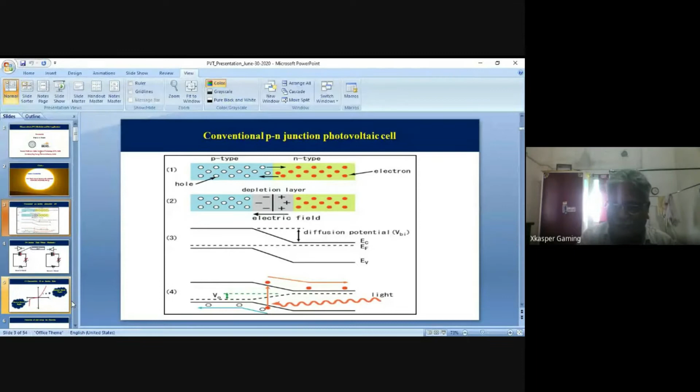Here again, I want to tell you one thing. Anyone who has seen the solar cell will notice the N is on the top, P is on the bottom, and the thickness of the N is in micrometers and the thickness of the P is in millimeters. The N is more conducting than P. All these points you should keep in mind so that I can explain to you in a better way how the solar cell is concerned.

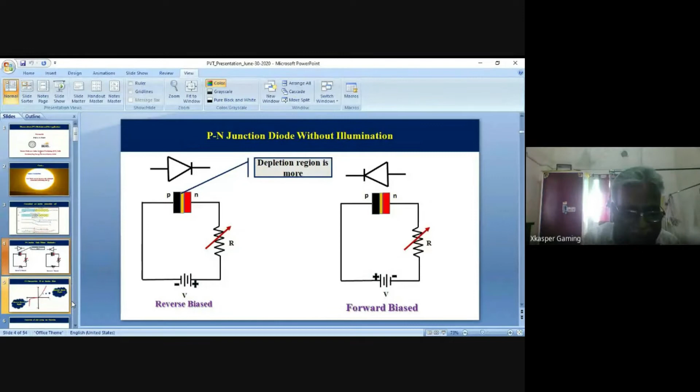So first, in these two diagrams, N and P type material has been shown on the left hand side. When the N, which is the negative terminal, is connected to the positive terminal, it is called the reverse bias. But when the N is connected to the negative, it is called the forward bias. That means the outer current by the battery is in the direction of the current created by the movement of the holes from P to N. So it is added, and because of that it is called the forward bias, and on the left hand side, since it is opposite, it is called the reverse bias.

Just see, now we have the battery in the external circuit, and we have the rheostat. By changing the rheostat, we can change the voltage, and once the voltage changes, the current changes. For different voltages, we will have different currents. If you plot this IV curve, in the forward region and the reverse bias, you can see it very well. This is a very well-known formula. Sometimes students refer to it as the VI curve, but it is not a VI curve, it is an IV curve, because the variable is on the x-axis and the dependent on the y-axis, just like y equals mx plus c. Now, next slide.

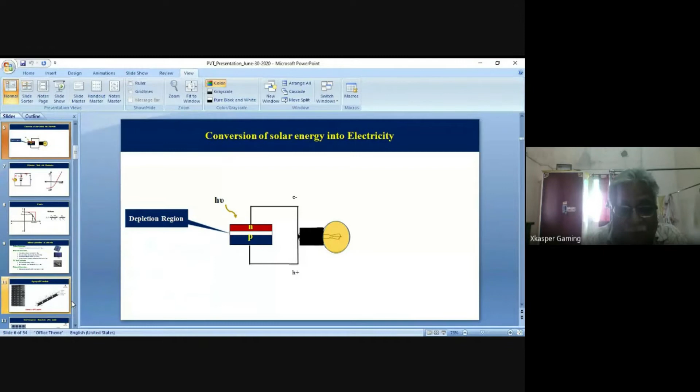Just see in this slide, N is on the top, you will see its thickness is less, in micrometers, and P is at the bottom. The depletion region is between the two materials, and this depletion region contains the neutralized electrons and holes. This you have to keep in mind. Now, h nu is the photon. Since N is the conducting, transmitting material, its thickness is less and resistance is less, so the photon is transmitted through the N material and reaches the neutralized region, that is called the depletion region.

Once this h-nu (photon) has higher energy compared to the binding energy of electron and hole—as I explained in the case of H2O, where photon energy was much higher than the binding energy of electrons and holes—similarly here also the photon has much more energy than the neutralized electron and hole.

So what happens? In other words, the photon is bombarded in the depletion region, and due to this energy bombardment, the electron and hole are separated.

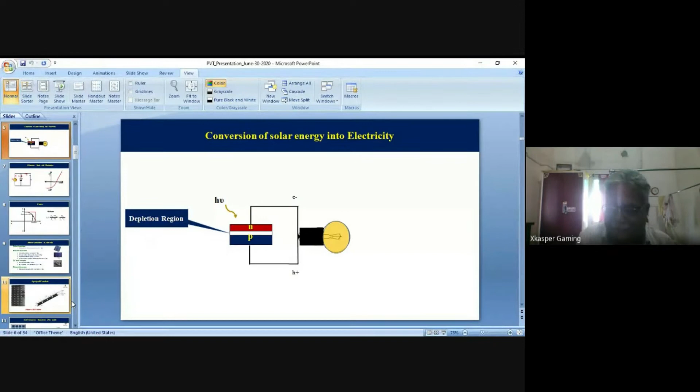Now it is referred to as a solar cell. Why? Because the PN junction generates electricity. It acts as a cell with positive and negative terminals. Solar energy is used, so it is called the solar cell. Sometimes it is called the photovoltaic effect—because the photon is responsible for creating the current produced in the PN junction. So the photovoltaic effect and the device is known as a solar cell.

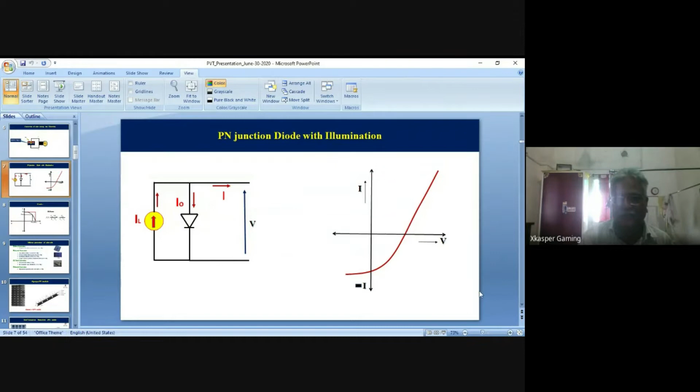So definitely this solar cell will have current and voltage, which I will discuss later on. But for now, just see when this curve is reversed, it takes this form. Why has current been made positive? Because power is never negative, but you know power is the product of current and voltage. So this curve is the IV characteristic for the solar cell.

If you analyze this curve in detail, we find that when voltage is 0, the current is known as short circuit current. But when the current is 0, it is the open circuit voltage. So in this IV curve, if you draw a rectangle using ISC and VOC, the area is ISC into VOC. Just see here I have used ISC into VOC—this is very, very important. And the IV curve is this.

For different irradiance G, if you plot the power, the power curve comes like this. That means the voltage at which there is maximum power is known as V maximum, and the corresponding maximum current is I maximum. So you have I maximum and V maximum forming a rectangular area. The ratio of this rectangle to the ISC-VOC rectangle is known as the fill factor. This is a very, very important parameter, and generally the manufacturer provides you the fill factor.

How do you define the fill factor? It is defined as the sharpness of the IV curve. If the maximum power point coincides with the ISC-VOC corner, then the fill factor is 1, which is next to impossible to achieve—so it is always less than 1.

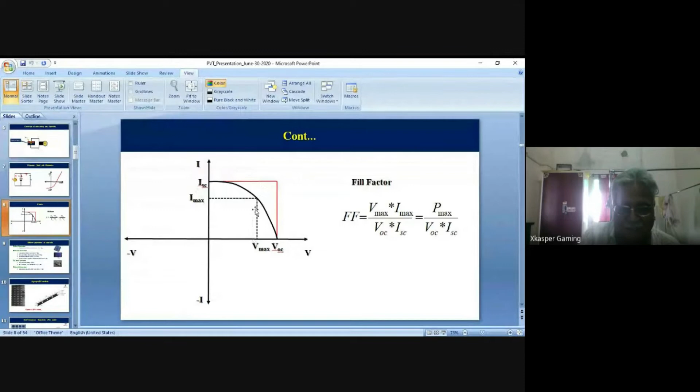Now there are different generations of the solar cell.

Earlier, every country manufacturing solar cells claimed their efficiency is more. So the international committee decided: you have to prepare a simulation lab where you create an intensity of 1000 watts per meter square and surrounding temperature of 25 degrees centigrade. Under that condition, if you predict the solar cell efficiency, that will be compared.

Generally, people say they have installed a 2 kilowatt solar system - it is actually under standard test conditions. I will discuss this later on. Now I will move to another part.

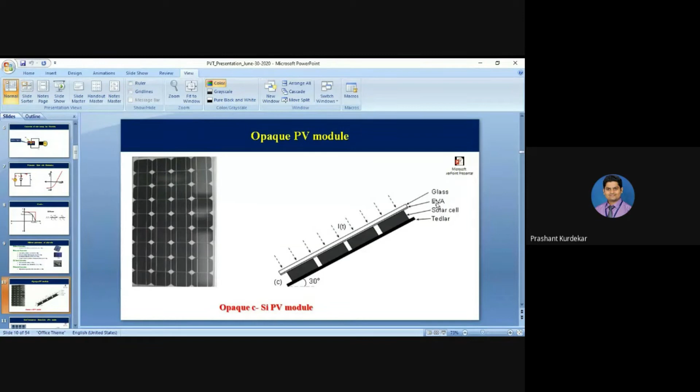Ask them not to disturb, because this is the crux of the problem - everybody can do research also, so my objective is to show how research is done in this area. So I will start from the greenhouse effect and consider the photon.

So just here, when I say it is a PV module, the solar cell is sandwiched between the glass and the Tedlar with the help of the EVA.

Say there is a gap between two solar cells, because earlier the solar cell was not in a rectangular shape, it was of a pseudo-square shape. So what happens when solar radiation is transmitted through the glass? It falls on the N-type layer of the solar cell, then is transmitted to the depletion region, and electricity is generated.

But here is a very important part. During peak time, like noon, the photon has maximum energy. So there is maximum creation of electrons and holes in the depletion region of the solar cell. If there is excess electron generation, the electrons collide with each other. Once collided, there is no smooth movement of electrons, and the current is affected, hence the power is affected. That is the crux of the problem in the solar cell.

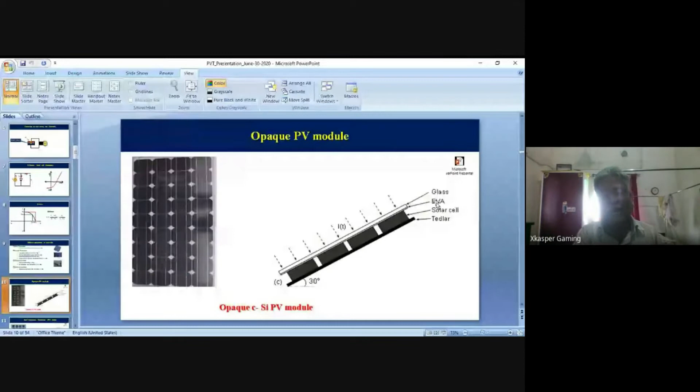Here, in place of the tedlar, glass was used, which is also transparent. Earlier also the solar radiation falls on the solar cell, and the number of solar cells is the same in both cases. But the difference was that when solar radiation falls between the two solar cells, in the earlier case it was blocked between the glass and tedlar. But here, it is transmitted from one side to the other side. This indicates that the solar radiation trapped between the glass and tedlar in the earlier case was more than in the present case.

So the thermal energy in this case is less than in case one. That means the temperature of the solar cell in this case is less than the earlier one. If temperature is less, collision will be less, electron flow will be streamlined, and current will be more. That means we found that only because of this temperature effect, the electrical efficiency of the semi-transparent PV module is more than the opaque sample.

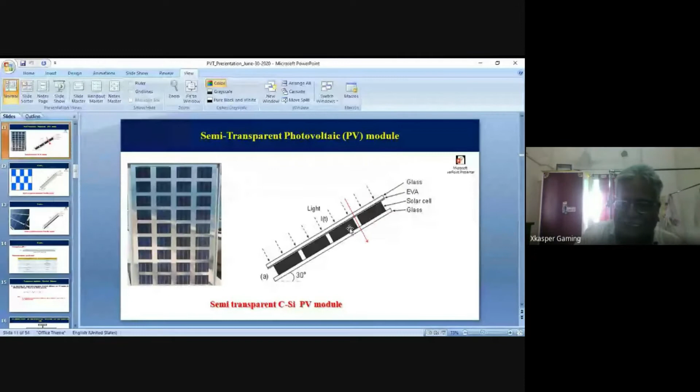And this semi-transparent PV module has many applications in buildings, greenhouses, dryers, pumping, everywhere. So one by one, I will discuss how this has applications in many cases.

Nowadays you can have rectangular type solar cells, and you will find that if the solar cells are joined together, you will not have the space, so all the solar modules will have the opaque PV module. But even when there is a gap between two solar cells and glass has been used, it's called semi-transparent.

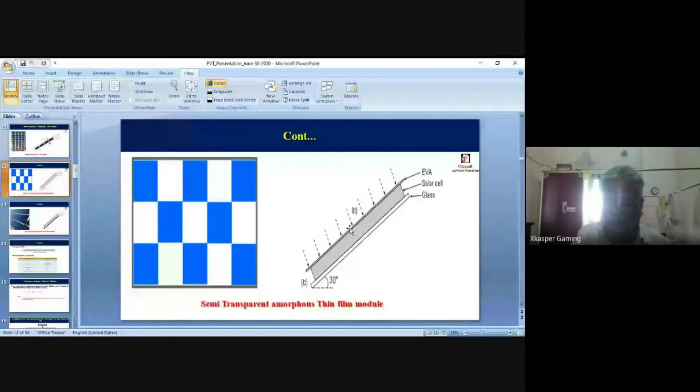Now these are another type, multi-crystalline, and this is thin film. The advantage of thin film is that it can be deposited on a metal sheet or glass sheet. When made on metal sheet, it is flexible in nature. So nowadays you might have learned that roofing is made of amorphous-based thin film, or even crystalline-based solar cell.

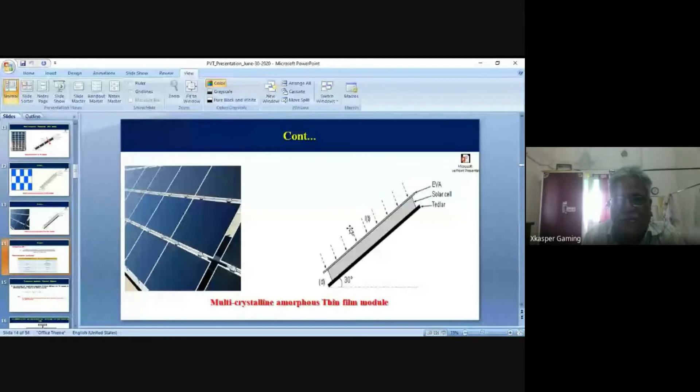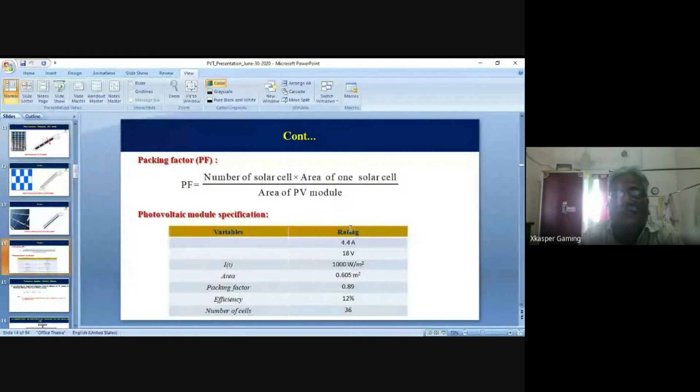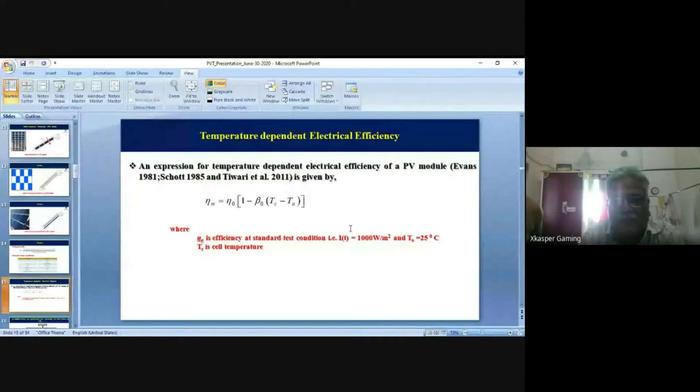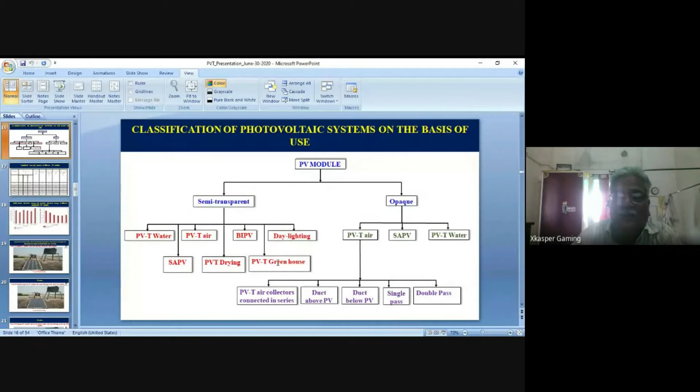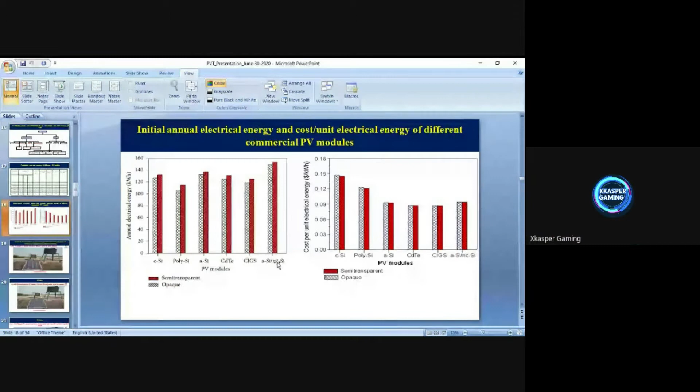Now, first I have shown you that the semi-transparent PV module has higher electrical efficiency than the opaque PV module. In the opaque, the base is the tedlar, and in the semi-transparent, the base is glass. Then we asked, is there any possibility of further increasing the electrical efficiency of the semi-transparent? So we did an experiment. To summarize, we considered both the opaque and the semi-transparent, and we flowed water over them to see whether the semi-transparent further increases electrical efficiency. Yes, we found it does, because the operating temperature of the semi-transparent PV module with water flow was lower than without flow, and the electrical efficiency further increased.

Then the question comes, is there any further possibility, in addition to water flow, that electrical efficiency can be increased? So we made a duct below the semi-transparent PV module and did the experiment with air flowing and water flowing over it, and we found that electrical efficiency further increased. Then the question comes whether the increase in electrical efficiency is beneficial or cost effective with water flow and the air duct or not.

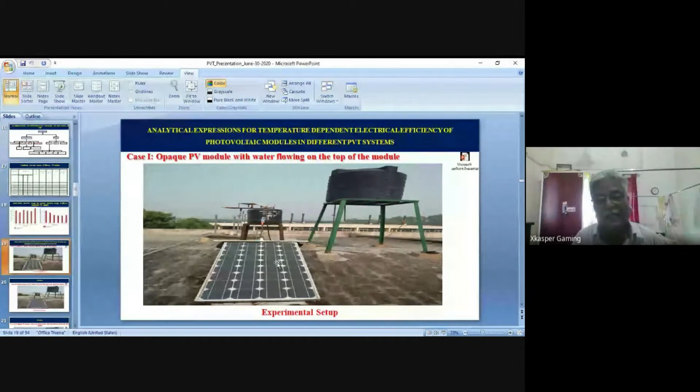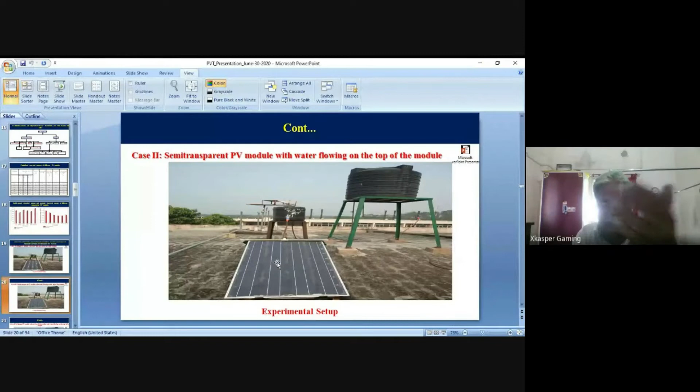So it totally depends upon the application of the electrical energy and the application of the thermal energy. If thermal energy is used for drying purposes, yes, it can be cost effective. If it can be used for space heating, like in cold climatic conditions where fossil fuel is used to heat the water, yes, it is economical. All these things I will discuss later on, so I will skip. This is the semi-transparent. The earlier one was the opaque. Yes, it is with the duct. Also this duct.

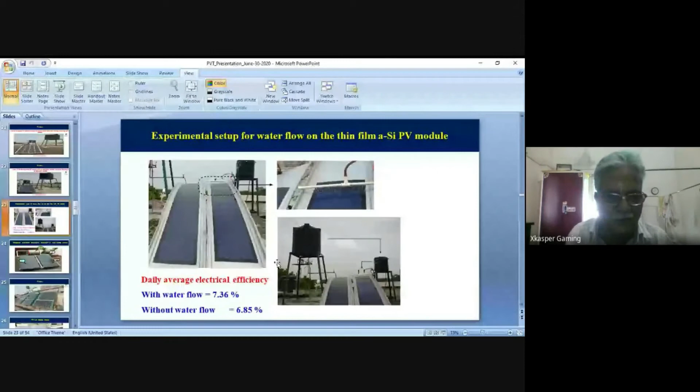Now this is thin film. As I mentioned, the thin film was coated on a metallic sheet, and generally this type of structure is used on buildings and airports. Actually, thin film technology is not available in India. It was the German people who came here, donated it to us, and did the experiment with water flow and without water flow, and we found that with water flow, the electrical efficiency is more.

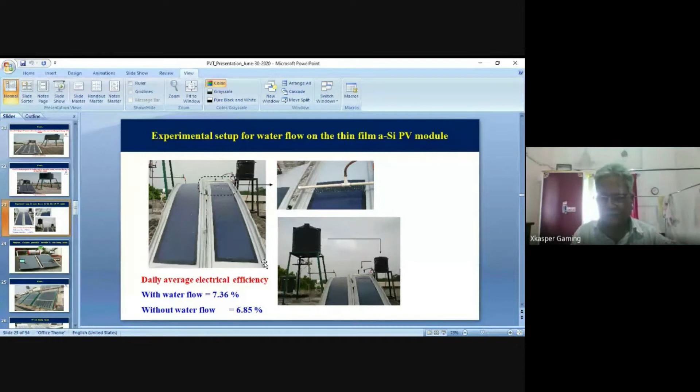Now, I'll come to the applications of the PV module, and one of the main applications was the water heater. Those who are working in solar thermal technology might have found that solar thermal technology works under the natural mode of operation and the forced mode of operation. And one might conclude that all solar thermal technology always gives better efficiency under forced mode of operation. But the natural mode has its own advantages and disadvantages, and the forced mode has its own advantages and disadvantages. For example, the water heating system.

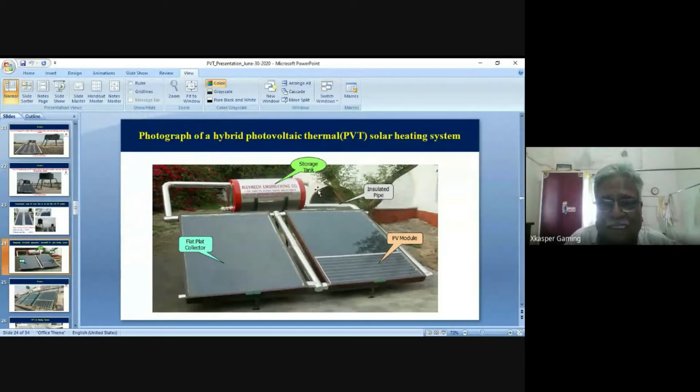This integration has two advantages. First, it provides the DC power, so the DC motor will operate. Second, the solar radiation falling on the non-packing factor area is directly transferred to the absorber, so thermal heating is there also. That means by integration, we are going to get two types of energy, electrical as well as thermal. Because of that, it is called photovoltaic thermal water system, PVT technology. When the semi-transparent PV module is integrated to provide electrical as well as thermal energy, in addition to daylighting, it is referred as a photovoltaic thermal system. And the whole system has been referred as a photovoltaic thermal solar water system.

Just see here, the other advantage of the forced mode is that collectors can be connected in series, but in natural circulation, collectors cannot be connected in series, so there is a limitation of the upper temperature. Because in large scale, you cannot have all collectors connected in parallel. So some parallel, then series, parallel-series. This is the combination on which 5,000, 6,000, 10,000 liter systems can be connected. And the electricity generated by the PV system can be used for the DC motor.

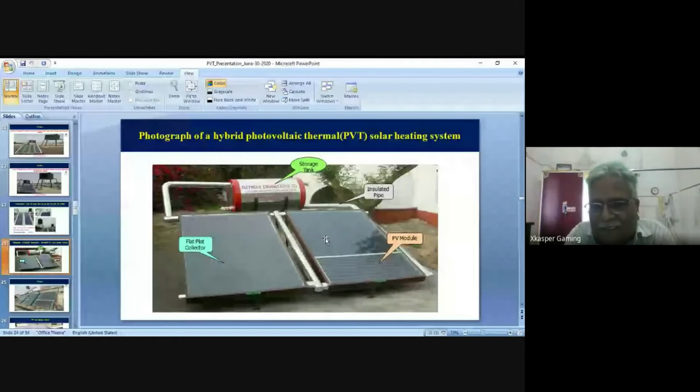Now here again, when you are doing some research, there are a lot of comments coming from the reviewers, and if you want to get your paper published, you have to satisfy them. So one of the reviewers says, why are you putting the glass below, why not outside? Now, in our country, it is very easy to say the glass should be up, and see the comparison.

So we mentioned that, sir, due to the financial constraint, we will not be able to do this experiment, but later on we'll do the experiment. So theoretically we found why not put it upper: because if you put it upper, the operating temperature becomes high, so electrical efficiency is less. So it is always better that the PV module should be at the lower end.

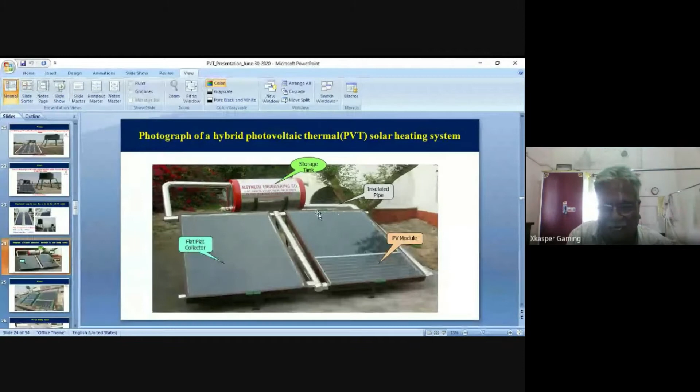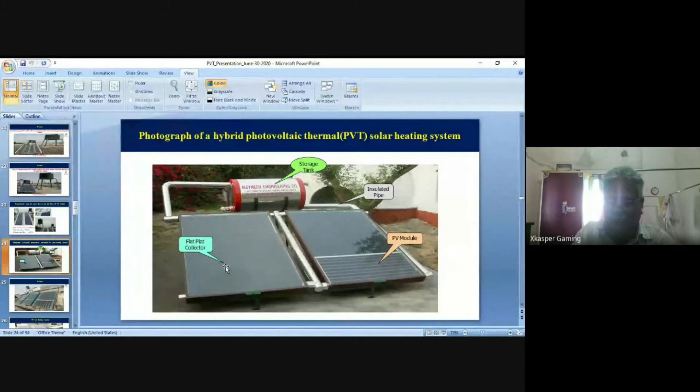But here in this case also, there was a comment: why not have half of the PV module on one collector and half on the other, so it looked nice. So we did that experiment, because the solar cell manufacturer CEL agreed to provide half the capacity of the PV module. Just see here, because it is toughened glass, cutting the toughened glass is very difficult, as you know, but cutting the solar cell was very simple. In the earlier case it was 75 watt, and this is 35 watt peak. And just see, we have connected it, and yes, it looks better than the earlier one. Now,

again, when this paper was sent for publication, another suggestion was: why are you covering half of the collector or 1/3 of the collector by PV, why not cover the whole? That is called fully covered. So basically we did that experiment also. I don't know whether we have the slides or not.

And from the solar cell manufacturer, just today we came to know that if you increase the area of the toughened glass without increasing the area of the solar cell, then for a given kilowatt hour the number of PV modules is more, and the cost is very, very large. So in that case, we can have a combination of PV module and glazing, PV module and glazing, and then it will be economical.

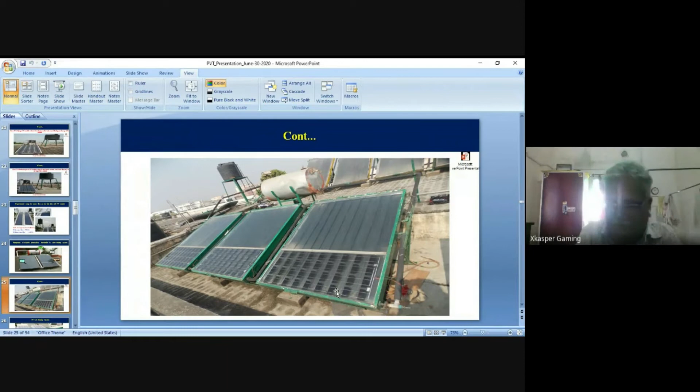Let's see. Actually, this is the first photovoltaic thermal air heating system, which we got done at IIT Delhi. And you'll find that there are two air ducts. And the beauty of this duct is that if you connect the outlet to the inlet, the temperature will increase. So here, it is fully covered. Let's see, we have done the experiment fully covered. You can see the PV module.

So when you are going to design any photovoltaic thermal system, you have to respect the demand of the user: whether the user needs more thermal energy or more electrical energy, or a combination of both. Accordingly you have to optimize the parameters. We have developed a theoretical model of the whole system, but it is very difficult to discuss the energy balance. By using the energy balance, we can optimize: if your priority is thermal, meaning space heating, then accordingly a series or series-parallel combination can be done. But when your priority is electricity, your connection will be different. So accordingly, we can do all these things.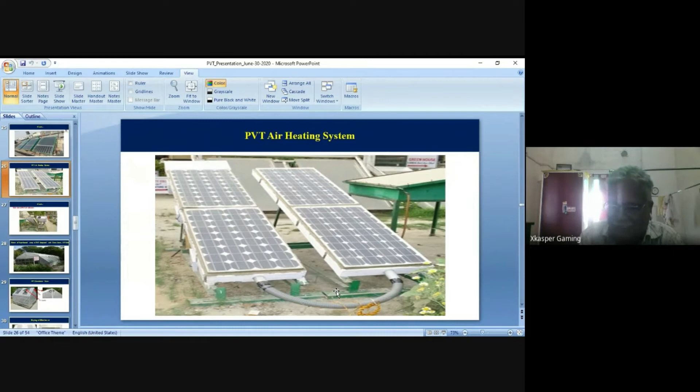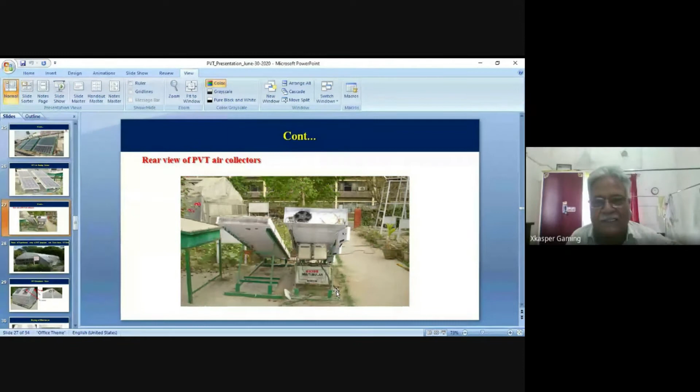Now just see here. You will also use a 1 fan, 2 fan facility, increasing the mass flow rate, and also store the electricity in the battery so it can be used at night time. Just see here. This is the greenhouse which we constructed earlier at IIT Delhi, and here all the cooling arrangement has been made.

And for your kind information, the cultivation of plants is very sensitive to temperature, relative humidity, light for photosynthesis and the carbon dioxide level. All 4 parameters are very, very important to greenhouse cultivation. That is called the microclimate greenhouse effect, not the global greenhouse effect, because the global greenhouse effect is with respect to the whole world. When we say micro, it means plastic, glass or any transparent material has the same property as the atmosphere: it transmits solar radiation, but after absorption, the long-wave radiation exchanged is blocked. So the temperature is controlled.

So we designed this greenhouse by considering all the cooling and heating effects. We have a misting arrangement, drip irrigation, pot cultivation and field cultivation. To operate the cooling arrangement you have seen and all these appliances, we need electricity. So we integrated a 2.4 kilowatt peak opaque PV module on the south roof. In that case, a part of the solar radiation was converted into electricity, and the rest is conducted below the PV module, which is used to heat the greenhouse space.

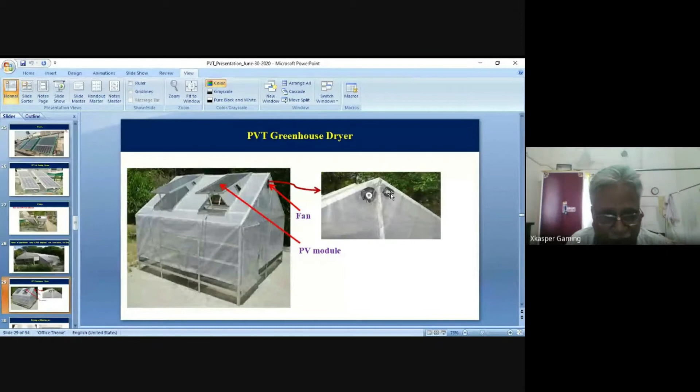Just see here. Here you might have seen the two fans. So it has a larger velocity, a higher mass flow rate. So I will tell you how this dryer works. Open drying is known to everybody. In open drying also, when the solar radiation is there, the crop absorbs the solar radiation, heats up, and moisture content from the crop is evaporated.

But this evaporated water has heavy molecules, so it stays above the crop. So what happens? Evaporation is affected, drying is affected because of the high relative humidity. Just like in monsoon season, clothes take more time to dry only because of the relative humidity. But when it is dry, the relative humidity becomes low and the rate of evaporation is fast, so drying is faster.

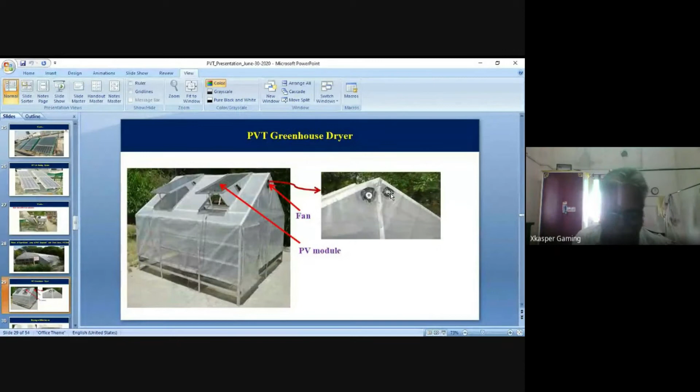So now you can see that in natural mode, the vapor escape is a very slow process. But in forced mode, the vapor is immediately transferred from inside to outside. Because of that, drying in forced mode is always better than in natural mode. See here, we have taken mint, pudina, and other things to dry out.

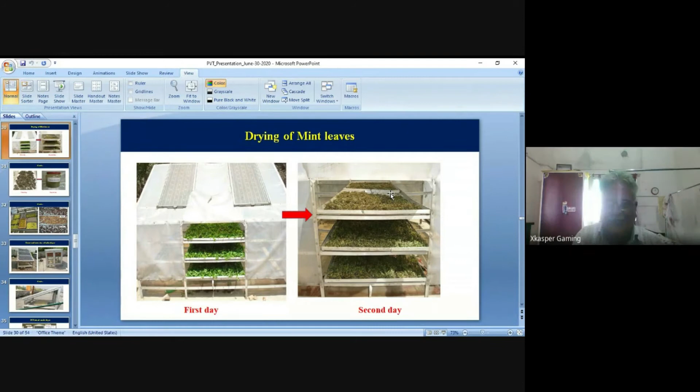There was a tray arrangement. We can dry 9 crops at the same time, but we have not done 9 crops at the same time. We have taken one, dried it, and then made the powder. Since it is pudina and dhania, the moisture content is maximum, so there is fast evaporation, meaning fast drying. Drying time is also important. So you dry it, make a powder, and you can store it. And by making a pouch, one can do entrepreneurship also by using such technology.

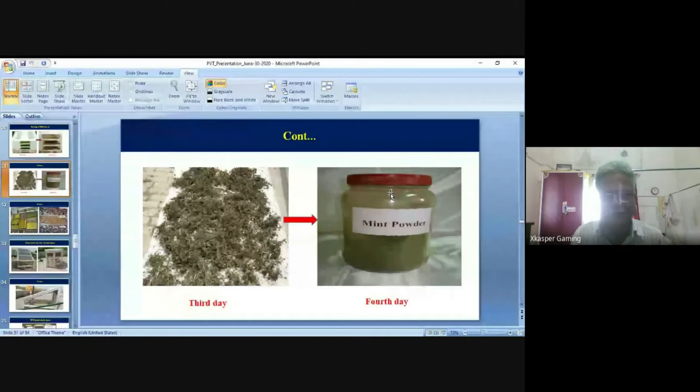Nowadays, drying is done using fossil fuel electricity. I think it is environmentally not friendly and also not good from the climate change point of view. Because of that, governments, mostly in developing countries, are giving importance to renewable energy for these activities. In other words, food processing can be operated by renewable energy. Or you can at least use 50, 60, 70% renewable energy and then go for conventional drying. So you can save fossil fuel.

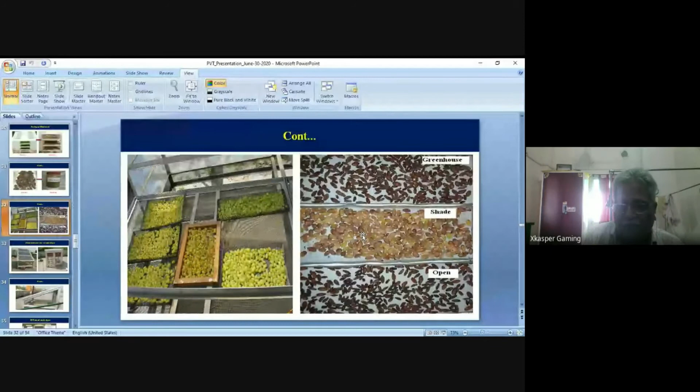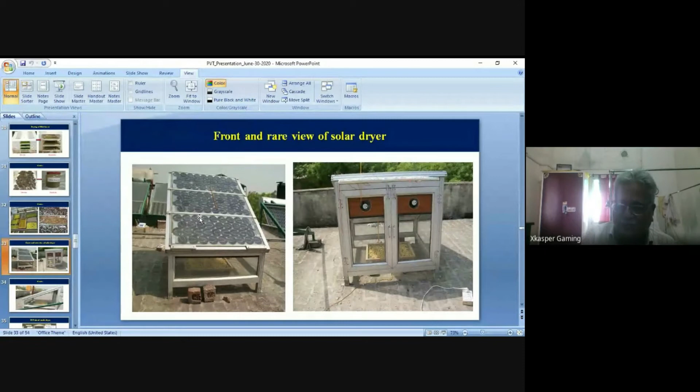Just see, this is an end view of this solar cell dryer. And here I want to tell you one very important thing, for any solar thermal devices, not only solar thermal devices, but any devices. For example, we are designing a building and we are using the aluminum frame. But if you are using screws of iron, what happens? The life of the iron screw, due to rusting, gets damaged.

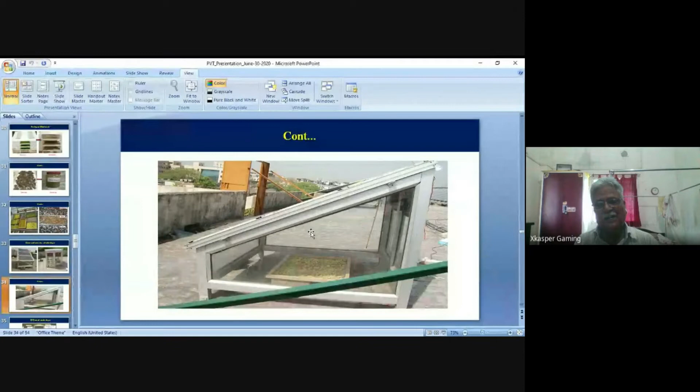And then to replace this, it becomes very difficult for aluminum, because if your aluminum has a certain screw, you need more diameter. So what I will suggest, as we did in Banaras, is that the material used for any component of the system should be the same. And glass and aluminum don't have the fusion factor. So for aluminum, every material should be aluminum, not iron or other material.

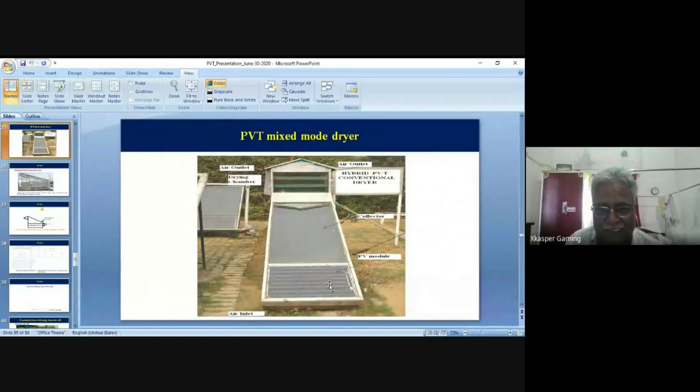Yes, this is called, you can say, the PVT mixed mode dryer. Why? Because this is the air heater, this is the solar PV module. The electricity is generated to operate the fan. So crops are kept here. So it is not directly heated. It is heated by the hot air mostly, and partly by direct gain.

So there are two types of gain in solar thermal devices: direct gain and indirect gain. Like in a window, using the glass, the solar radiation comes through direct gain, but if heat is coming through the opaque wall, it is indirect gain. So since in this case we are using direct as well as indirect, it's called a mixed mode dryer.

Just see, this is another type of dryer, which has been working since 2012, and except the fan, we have not replaced anything, including the tray, which was aluminum-based wire. So once you are using similar material for fabrication, the life is long, because if you go for life cycle cost analysis, operation and maintenance plays a very, very important role.

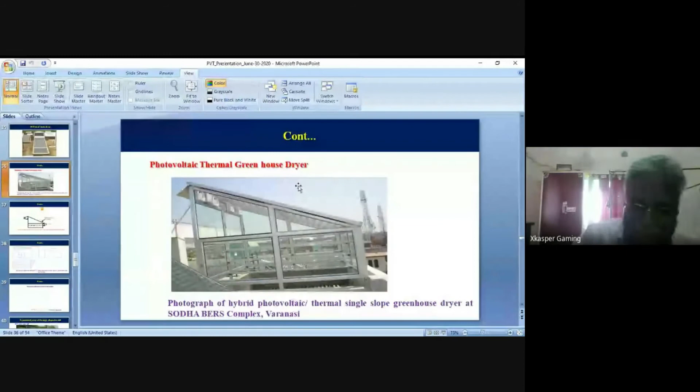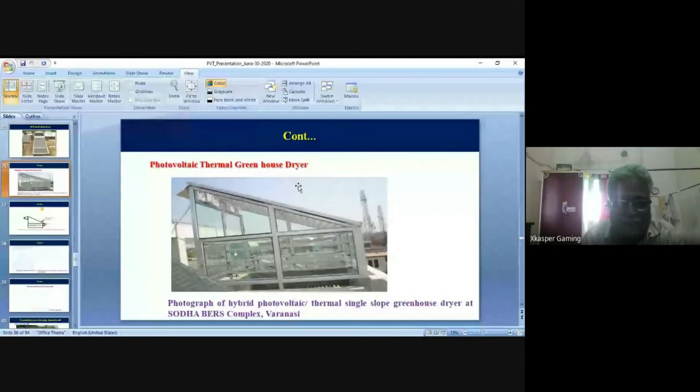And in this case, particularly when you go to the rural area, if you want to change a screw or something like that, a tray, it is not cost effective. So in that case, if similar material is used, the maintenance will be less, so it will be economical.

Now, this is a concept for which we have submitted a project to DST, and sometimes I receive a lot of queries about the submission of projects and things like that. So unless you have a new idea, a new concept, even when you are in IIT, you face a lot of problems. So unless you have the idea, it becomes very difficult.

So now just see. I have just shown the working principle of this PVT dryer.

I'll just show you. Here is a fan at the top to remove the moisture from inside to outside, so the relative humidity will be less and drying will be faster.

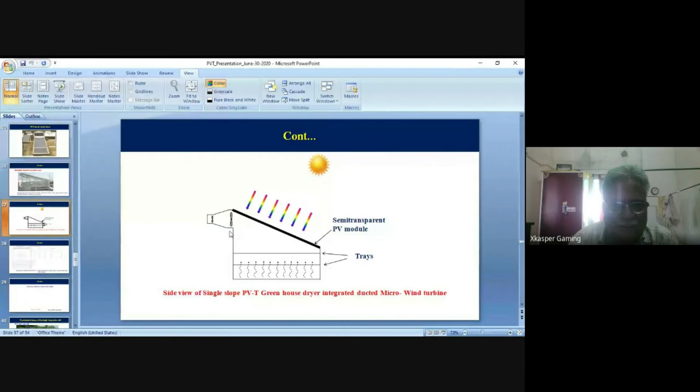Actually, what we use here is Bernoulli's theorem, that if this cross-sectional area is reduced to a smaller one, what will happen? A1V1 equals A2V2, so the velocity of this air will be increased.

And if velocity increases, we thought, is there any possibility of using a micro wind turbine? So when there is waste heat, hot air, can this be used to further generate electrical power?

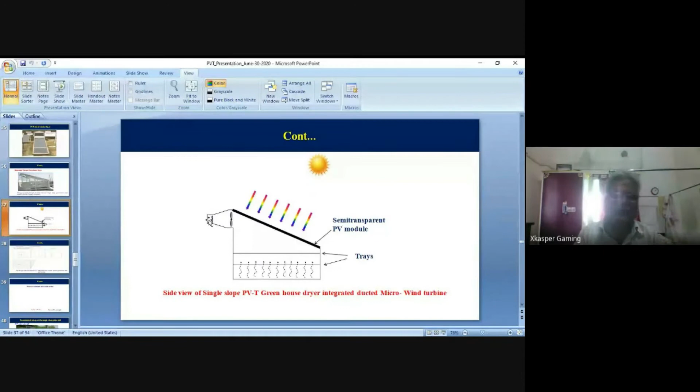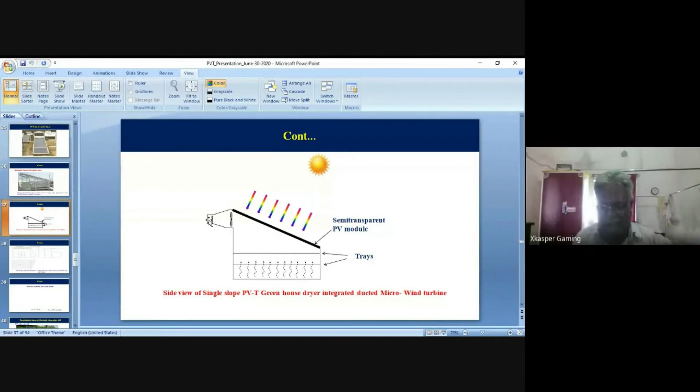That was the concept. It is not easy to convince everybody about a new concept, because many questions come up, like with such small velocity, how are you designing the micro wind turbine, this and that. But we said we have not given up on this. We are going to implement this for a bigger project, which I will show you later on.

Now, another application. We will discuss the wind turbine effect later on. Another experiment was a solar distillation system.

As I explained, in solar distillation, the top is a solar distillation unit with glass. The solar radiation, short wave radiation, is transmitted by the glass and is finally absorbed by the water mass and basin, and ultimately the water gets heated.

As I explained, when the water temperature becomes higher than the glass temperature, evaporation takes place, just like in an open cycle. Just assume sea water, how evaporation takes place. Evaporation takes place only when the water temperature is relatively higher, not lower.

It is an open water cycle versus a closed water cycle. In a closed water cycle, our relative humidity is 100% inside the enclosure.

That vapor is condensed on the inner surface of the glass, and since it is inclined, it will trickle down and be collected. It becomes pure distilled water, which can be made equivalent to potable water by mixing in minerals, or by mixing brackish water or other suitable water.

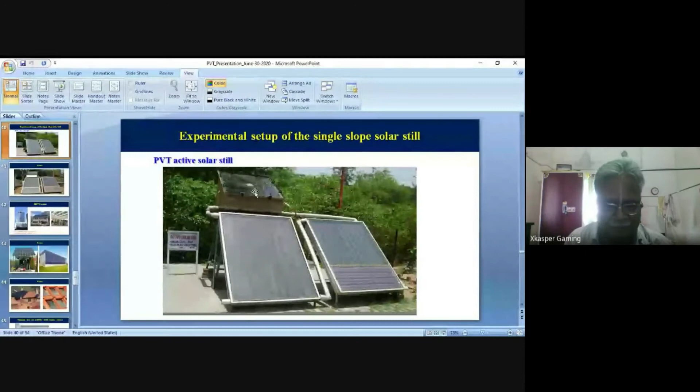Here I want to make a clarification: efficiency is a different factor and yield is a different factor. Efficiency totally depends on the operating temperature, just like yield. For example, the active solar still has maximum operating temperature, but its electrical or thermal efficiency is lower compared to the passive solar still.

So you have to be very careful about whether users are interested in yield, because they are always interested in yield. They don't bother about what the efficiency is.

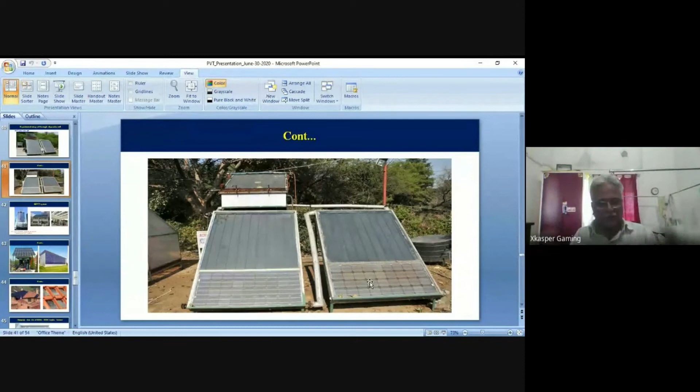If time is there, let me know. Hello. Hello, next session is at 2:30. Yes sir, accordingly I can. Hello, yes, tell me. Next session is at 2:30. So we have sufficient time, sir, there is no problem. Okay, then I will go slowly, and then I will talk to other people. Right?

Okay sir, now just see these, actually this is in our country. When I say don't take specific states or other things, developing countries means our country, as opposed to developed countries. So there is a basic difference, this concept of developed countries and developing countries.

If you go to a developed country and a new technology comes into the picture, they always try to adapt themselves. They don't expect the government to give a subsidy or financial help. Financial help is different from subsidy. Unlike our country, where we always expect the government to give a subsidy before we use it. I will give an example.

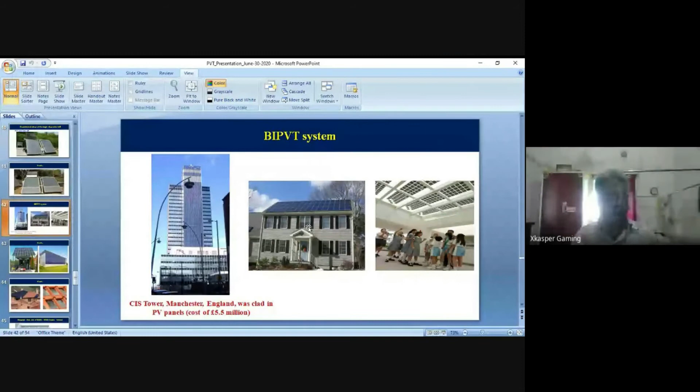But if you want to design the building for the composite climate where cooling is maximum required, the single glazed window should have minimum exposure to solar radiation. Because once you use glass, it gives maximum direct transmission of solar radiation. As I mentioned, glass transmits all sorts of radiation, and once it is transmitted inside, it heats up and the heat cannot escape outside. So you want cooling on one hand, but you are heating on the other side.

But unfortunately, what is happening? If you look around, another trend is that people are using maximum glass on the exterior because it looks nice.

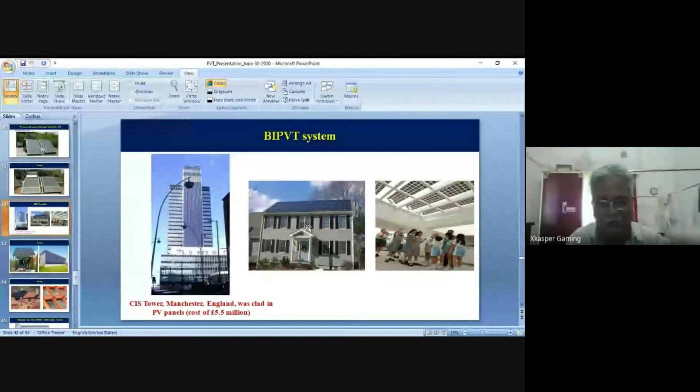So you have to take into consideration this point that when you are using solar energy, be careful.

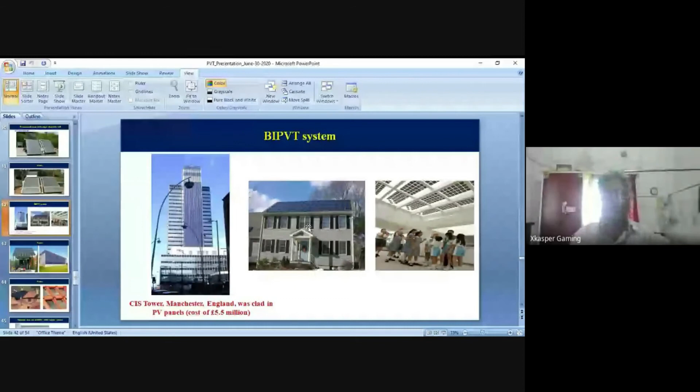So it acts as a roof also. Nowadays in our country, different petrol pumps have standalone systems, but separately, not integrated to the roof. But it should be integrated to the roof. Then you can ask, sir, what is the advantage? In that case, you don't require additional land. And in our country, land is a very rare resource because we use land for agriculture purposes.

So this is called roof integration of the solar system, and this is a self-system, because here I want to tell you two things: one is a grid system, one is an off-grid system. Grid system is when the grid has 24-hour electrical availability, then you can install a PV system on your roof and connect it to the grid.

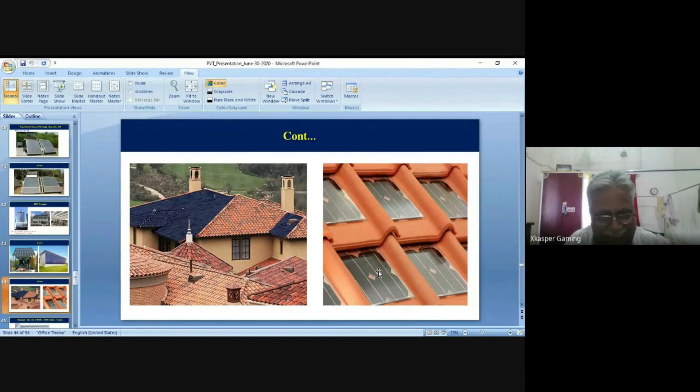Now, actually when I was in IIT Delhi, I got educated from Banaras University. So those who might have been to Banaras University, an old university, maybe Allahabad University, or even in Silchar, you can see the old houses of the DM and other things. So you may find what I am trying to tell you.

That for thermal comfort, there is a concept of Trombe wall, thick wall. The thick wall is not generally used only for the winter, it can be used for the summer also. So thick wall means, in a technical term, the U value should be very, very small. That is the one concept which has been installed in this building.

Because you people are very young people. So when I was also in IIT, we found that when senior people retire, their whole established lab is renovated by saying that it is outdated, and obviously they create new. When they retired and a new generation came, they again said it is outdated. These are fact situations everywhere, not only in IIT. So I was keeping this in mind that when I also retire, what we have done in the Solar Energy Park will be dismantled, and it happened like that. So I don't have any regrets for that.

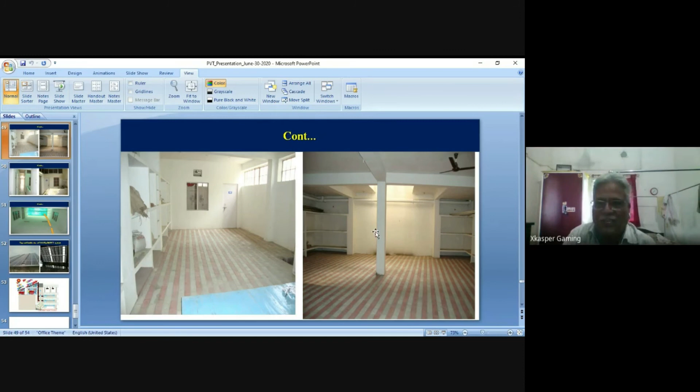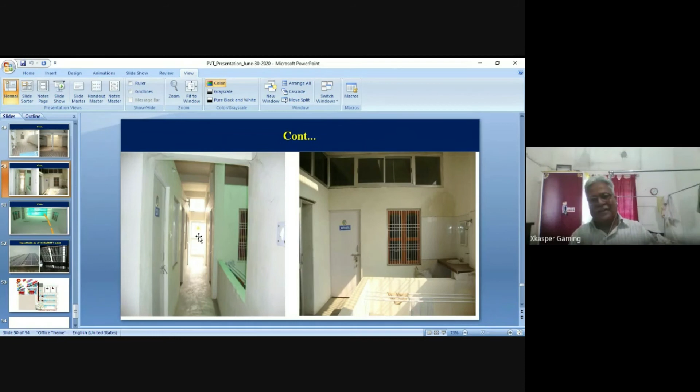Let's see here. Here, the wind tower is there and a courtyard type situation. So the daylight is provided for all this. And this is cross ventilation because we divided the building into 2 parts. One part is this, another part is this. So just see the cross ventilation. Through cross ventilation, hot air always escapes through both wind towers.

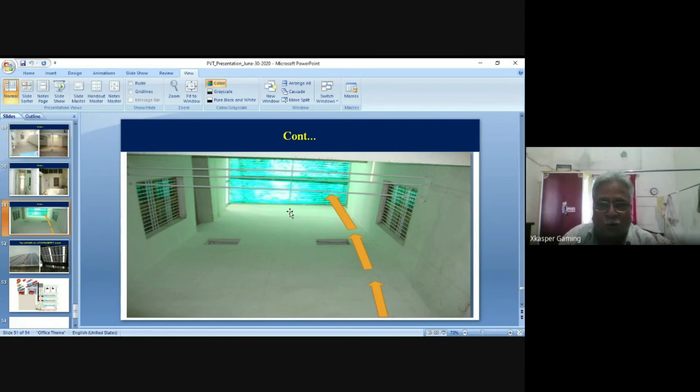Just see. Here it is, the first wind tower. It is in the center of the building. So in that case, what happens? We are facing a lot of problems due to the opening. Why? Because birds sometimes, monkeys sometimes come inside the building and they create havoc.

To avoid that, we have a grill shade. And grill shade means a sliding window also, so the hot air can go up. But the advantage is that during the rainy season also the water doesn't come into the building. It is protected from all these birds and monkeys and other things, dust also.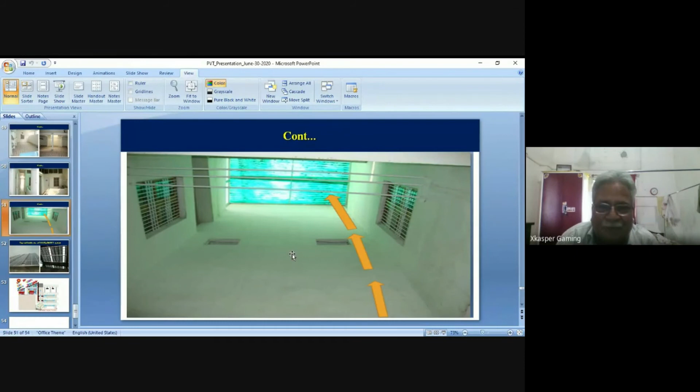And the second thing is that all these walls are white, so the reflectivity is more. So the daylighting is reflected back into different rooms connected with these windows. So considering all this, the maximum daylighting saving is there itself.

Now before that, I want to just tell you one thing. Oh, sorry.

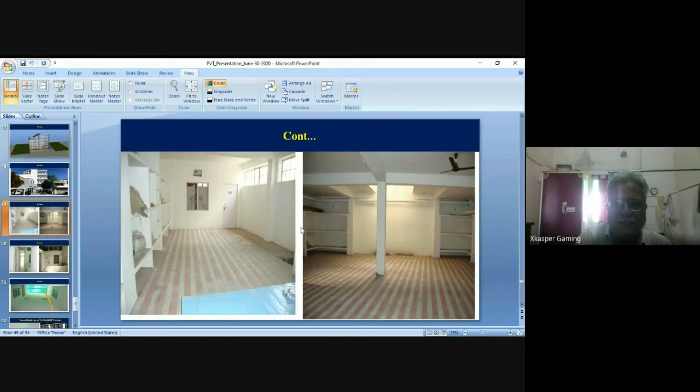Yes. Here I forgot to tell you, here there is an inclined, you can say, beam. Keep this in mind, because once you want to integrate a semi-transparent PV module into the building, you have to plan before, so it can be integrated into the structure itself.

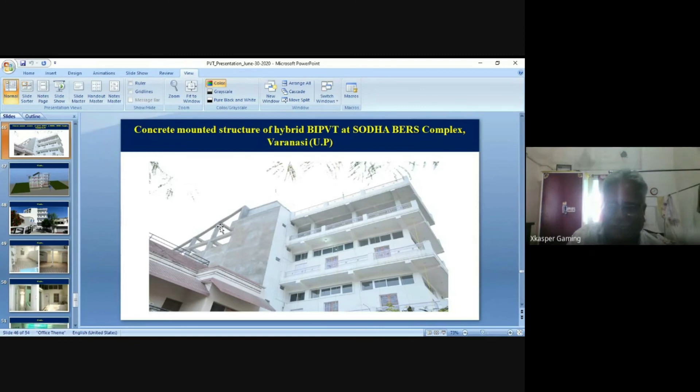When the semi-transparent PV module is integrated into the structure, it is called a building integrated semi-transparent photovoltaic thermal system. It will provide electricity as well as thermal energy, and the enclosed space can be used for a sun bath, or you can use it for drying also. So it has multiple applications, and you can benefit from that. This is the culmination of all these things.

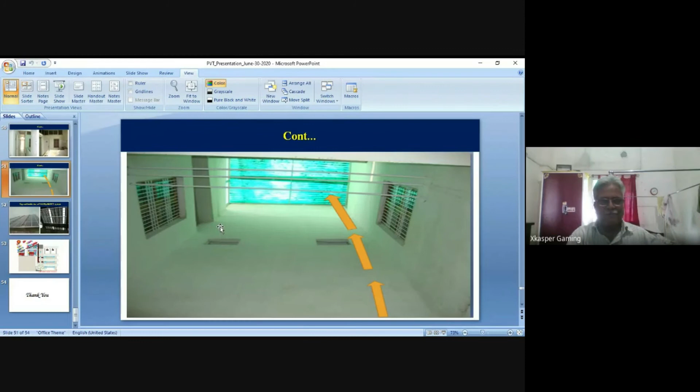Now just see. I will come to the end of this, but I will also share, without slides, something which we have done in Ballia. But the concept is the same. Just see here. Here we have used the semi-transparent PV module. Just see, here is a staircase, because, as I said, of the limitation of the roof surface. So by using this, we can clean it very easily.

Cleaning is important because dust reduces the performance of the electrical system very sharply. Particularly in the summer, we need cleaning once a week minimum. In the monsoon season, you require cleaning only once, because dust deposition is removed. In winter also there is less maintenance, but in summer you require regular cleaning, otherwise electricity production is very low.

Now the question comes: to clean this area, you need a lot of water. Yes, we need a lot of water. One can say that there can be a wastage of water. No. What we did, just see, at the lower end we made a provision for collecting this wasted water, and we have a rain harvesting system at the basement. So that water is sent to the rain harvesting, so the underground water level can be maintained.

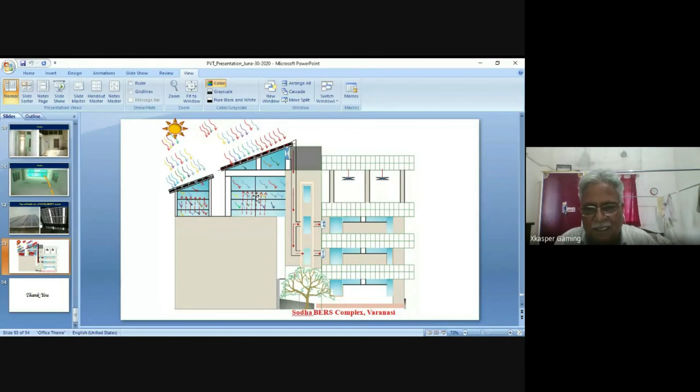So now, another thing which I want to tell you about is my activity at Ballia. We have a building integrated semi-transparent photovoltaic system. I have already shown you the greenhouse. In that case, if the roof of the greenhouse is integrated with the semi-transparent PV module, then we refer to it as a greenhouse integrated semi-transparent PV module, GiSPVT. Greenhouses are of many types, so we have used the uneven type of greenhouse system. And in Ballia, we have 30 kilowatt peak of different packing factors, which we have already constructed.

This is the Mission Innovation project. This is an international project. The main objective of this project was that there is a lot of desert area which is not used so far. So we have constructed this greenhouse integrated photovoltaic thermal system, GiSPVT, for cultivation of crops in pots as well as brick channels, and the electricity provided by it is going to be utilized for supply to the nearby school or to run electric vehicles like e-rickshaws.